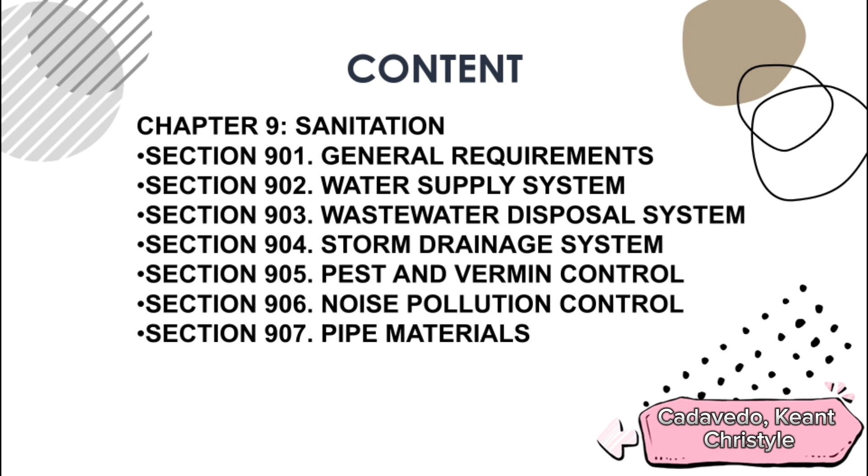So here's the content of our report. Chapter 9, Sanitation: Section 901, General Requirements; Section 902, Water Supply System; Section 903, Wastewater Disposal System; Section 904, Storm Drainage System; Section 905, Pest and Vermin Control; Section 906, Noise Pollution Control; Section 907, Pipe Materials. Chapter 10, Building Projection over Public Streets.

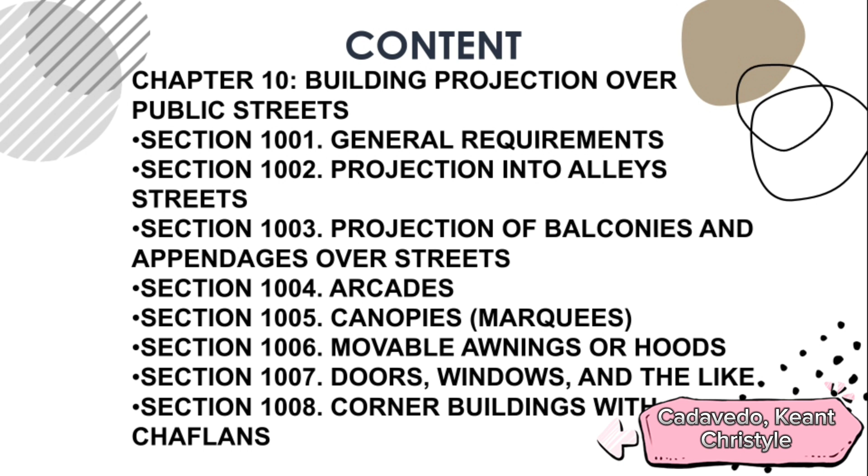Section 1001, General Requirements. Section 1002, Projection into Alleys and Streets. Section 1003, Projection of Balconies and Appendages over Streets. Section 1004, Arcades. Section 1005, Canopies or Marquee. Section 1006, Movable Awnings or Hoods. Section 1007, Doors, Windows, and the like. And lastly, Section 1008, Corner Buildings with Chaflans.

First section under Chapter 9 is General Requirements. Nakasaad dito yung mga nire-require na dapat meron ang isang bahay. It requires that every building intended for human habitation shall have first an adequate and potable water supply. Dapat meron malinis na tubig and sapat na tubig para sa mga taong naninirahan.

Next is plumbing installation, meaning ito yung way ng clean water na papasok sa bahay and meron ding dapat na way para sa wastewater na palabas. It could also mean na dapat merong heating and cooling system yung bahay. Next, you shall also have stormwater drainage, ito naman para sa tubig ulan.

Next is pest and vermin control, so dapat yung bahay or building ay protected from pest and vermin. Ano nga ba ang ibig sabihin ng vermin? Basically, yung vermin ay yung daga, ipis, bedbugs, termites, and such organisms na nakaka-disturb o nakaka-istorbo sa mga occupants.

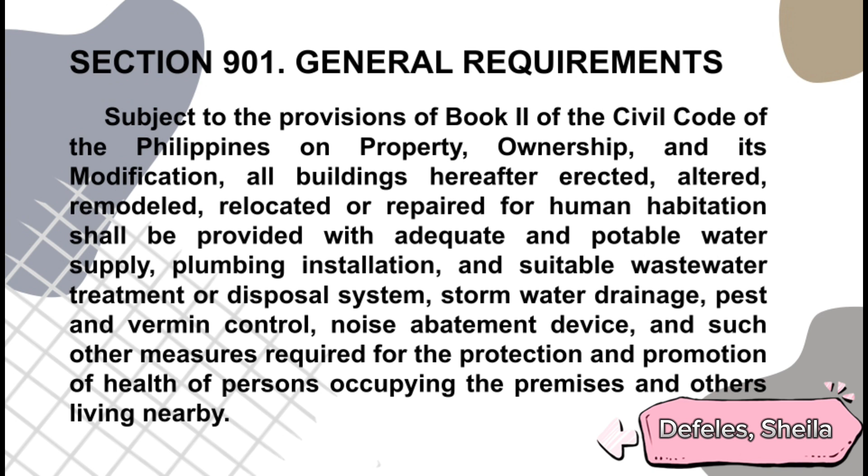Next is dapat merong noise abatement device. Ang purpose naman ng noise abatement device ay to control the industrial noise pollution. And lastly, dapat it shall promote health of person occupying the premises and others living nearby.

Second section under Chapter 9 is 902, Water Supply System. Under it, A: whenever available, the potable water requirements for a building used for human habitation shall be supplied from existing municipal or city waterworks system. Ang sinasabi dito ay kapag magtatayo tayo ng building o bahay for human habitation, yung magiging supply natin ng water ay dapat nakakonekta sa isang existing municipal or city waterworks system.

Example dito ay yung Manila Water. I-connect lang natin doon yung mga pipes natin para makapag-provide sila ng safe and potable water to supply the residents ng iyong building. The quality of drinking water from meteoric, surface, or underground sources shall conform to the criteria set in the latest approved national standard for drinking water.

Ang example dito ay yung mga area o bahay na hindi directly nakakonekta sa Manila Water, since ang Manila Water naman ay nag-provide ng potable water. Example dito ay yung mga deep well. Sa deep well, ang source nun ay from underground. Kaya hindi lang basta-basta dapat kumukuha ng tubig doon, dapat na-test siya and nakaayon sa sinasabi dito na national standard for drinking water.

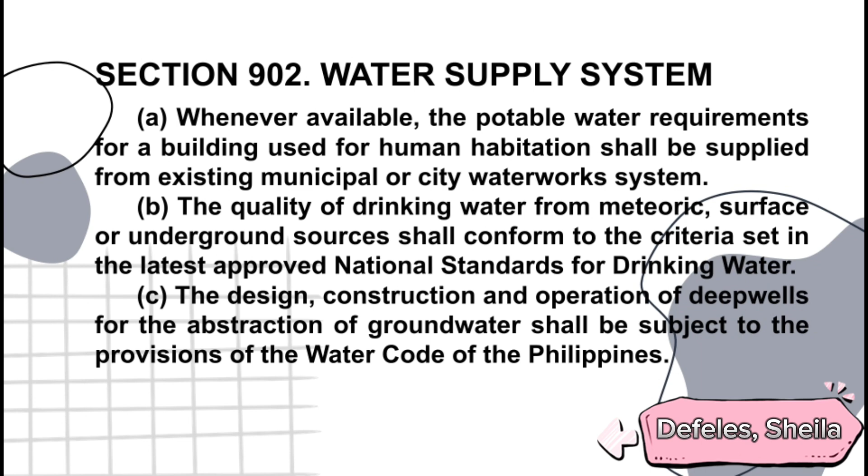The next one: the design, construction, and operation of an independent waterworks system for private housing, subdivision, or industrial estates shall be governed by the existing laws relating to the local waterworks system. Dito naman, kahit independent o private na ang mga water supply system na pinapatayo nila, dapat ang design, construction, and operation pa rin nun ay under or governed by the existing laws relating to the local waterworks system, since yun na ang standards na dapat sinusunod.

The last one under Section 902, Water Supply System: the water piping installation inside the buildings and premises shall conform to the provisions of the National Plumbing Code of the Philippines. Basically, ang sinasabi lang dito sa huli na ito ay lahat ng piping installation sa isang building na itatayo o sa isang building na may human habitation ay dapat naka-conform o naka-ayon sa provision ng National Plumbing Code of the Philippines.

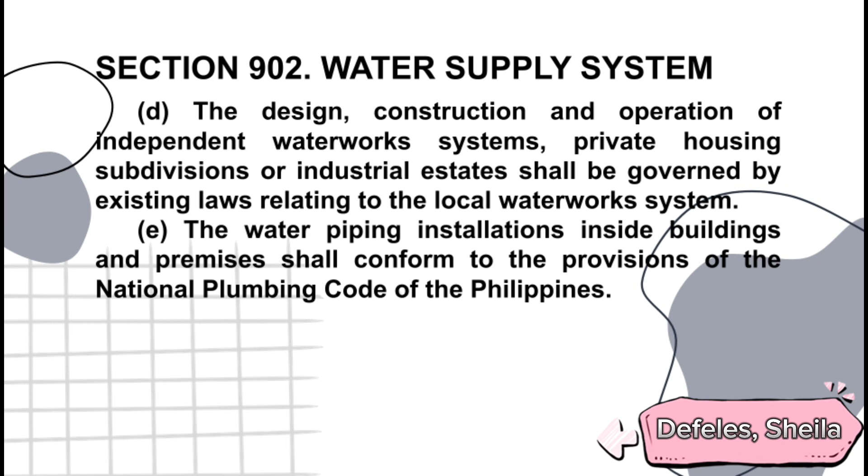And sinasabi na ang main goal lang naman ng National Plumbing Code of the Philippines is to ensure the qualified observance of the latest provision of the plumbing and environmental law.

The third section under Chapter 9 Sanitation is Section 903, Wastewater Disposal System. Clause A: Sanitary sewage from buildings and neutralized or pre-treated industrial wastewater shall be discharged directly into the nearest street sanitary sewer, main or existing municipal or sanitary sewerage system, in accordance with the criteria set by the Code on Sanitation and National Pollution Control Commission. Bale, sinasabi dito na yung sanitary sewage from buildings or mga industrial wastewater is dapat ini-discharge directly sa pinakamalapit na street sanitary sewer. Pero hindi lang syempre yung sinidischarge ng basta-basta, dapat in accordance with the criteria set by the Code on Sanitation and the National Pollution Control Commission.

So first, ano ba yung Code on Sanitation? It is said na the objective of this Code on Sanitation is the improvement of the way of life of the Filipinos by directing public health service towards the protection and promotion of the health of the people. So basically, yung main goal niya is paprotektahan yung Filipino citizens from dun nga sa mga harmful effects ng sanitary sewage or industrial waste. Then next is the National Pollution Control Commission.

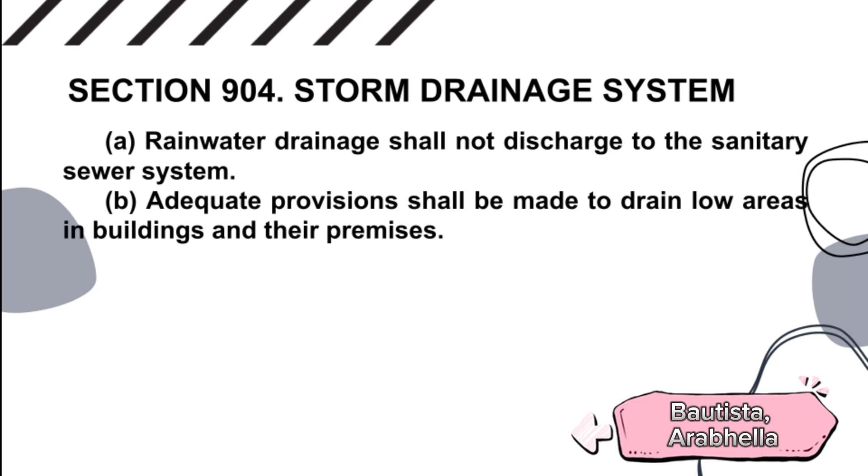Section 905, Pest and Vermin Control. A. All buildings with hollow and/or wood construction shall be provided with rat proofing. So, ayun, to prevent rats from entering our home, especially yung mga bahay na gawa sa light materials, ay dapat provided with rat proofing or harangan ng screen yung mga entry point or mga butas na maaaring pasukan ng daga.

B. Garbage bins and receptacles shall be provided with ready means for cleaning and with positive protection against entry of pests and vermin. So, dapat yung mga garbage bins and receptacles ay panatilihing malinis at may takip upang hindi pamugaran or pasukan ng mga pests and vermin.

Yung mga pests ay yung mga langaw, at vermins naman ay yung mga daga. Section C: Dining rooms for public use without artificial ventilation shall be properly screened. So yung mga dining rooms na intended for public use at hindi ginagamitan ng artificial ventilation like exhaust fan ay dapat properly screened o protected ng screen yung mga butas na maaaring pasukan ng pests and vermin like doors and windows.

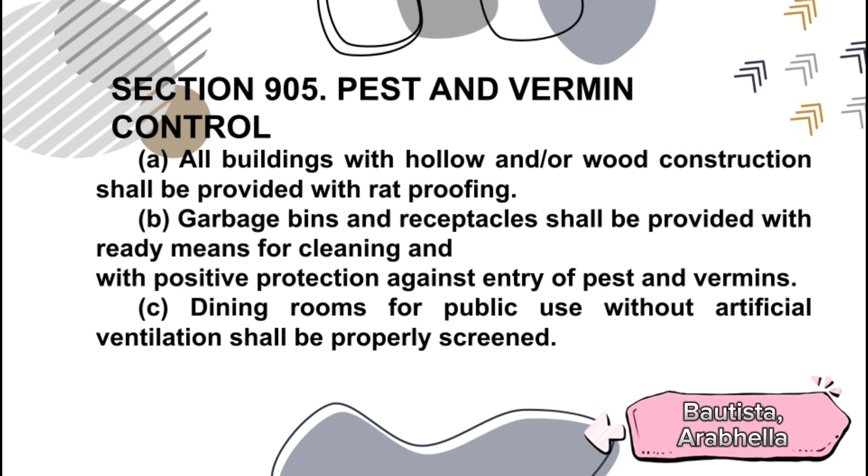Section 906, Noise Pollution Control. Industrial establishments shall be provided with positive noise abatement devices to tone down the noise level of equipment and machineries to acceptable limits set down by the Department of Labor and the National Pollution Control Commission. Karamihan ng mga equipment and machines na ginagamit especially sa construction and industrial establishment ay may ingay, kaya para mabawasan yung ingay na produce ng mga equipment and machines kapag ginagamit especially sa gabi, dapat may provided na noise abatement devices para hindi nakakaabala sa mga taong malapit sa area.

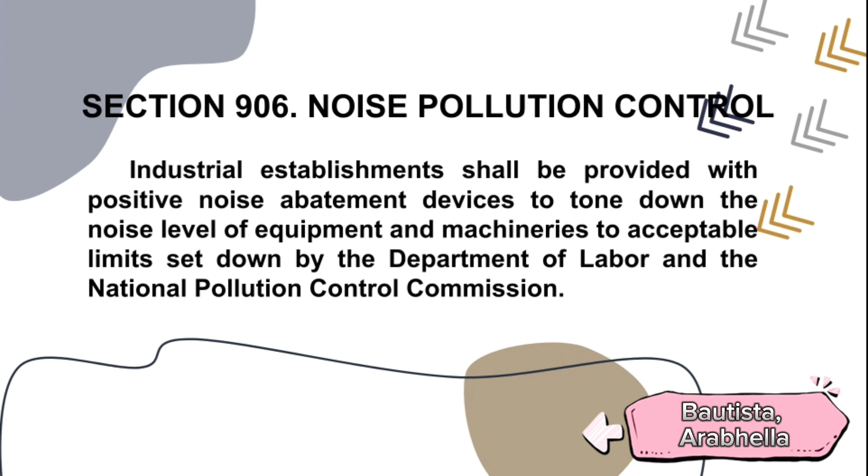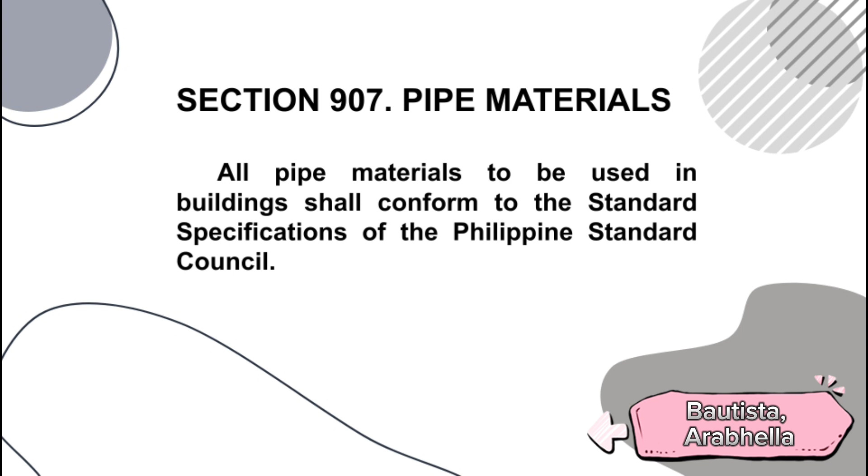Our next topic is Chapter 10, the building projections over public streets. In here we can see or learn the requirements of the buildings that are near a public street.

The first one in Chapter 10, Section 1001, General Requirements. A: No part of any building or structures or any of its appendages should project beyond the property line of the building site except as provided in this code. The projection of any structure or appendage over a public property should be the distance measured horizontally from the property line to the outermost point of the projection.

Ibig sabihin, hindi pwedeng lumagpas ang anumang structures ng building mo sa ibang gusali na hindi nasakop ng property niyo. Halimbawa, may tanim kang puno ng mangga sa bakuran. Kung yung sanga o bunga nito ay lumagpas sa bakuran ng kapitbahay niyo, yung part ng puno na yon ay magiging property o pagmamayari na nila. Ganun din kung lumagpas ito sa daanan ng tao, magiging public property na ito. Kung hanggang saan lang yung property line niyo, dapat hanggang doon lang din yung structures ng building mo.

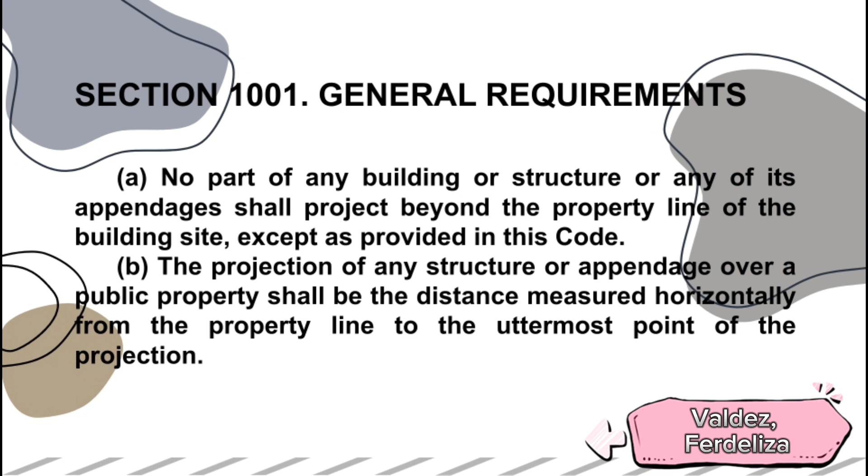Section 1002, Projection into alley streets. No part of any structure or its appendage shall project into any alley or street, national road or public highway except as provided in this code. Footing located at least 2.40 meters below grade along national road or public highway may project not more than 300 millimeters beyond the property line. So along a public highway, the projection should not extend more than 300 millimeters and the footing should at least be located at 2.40 meters below the grade.

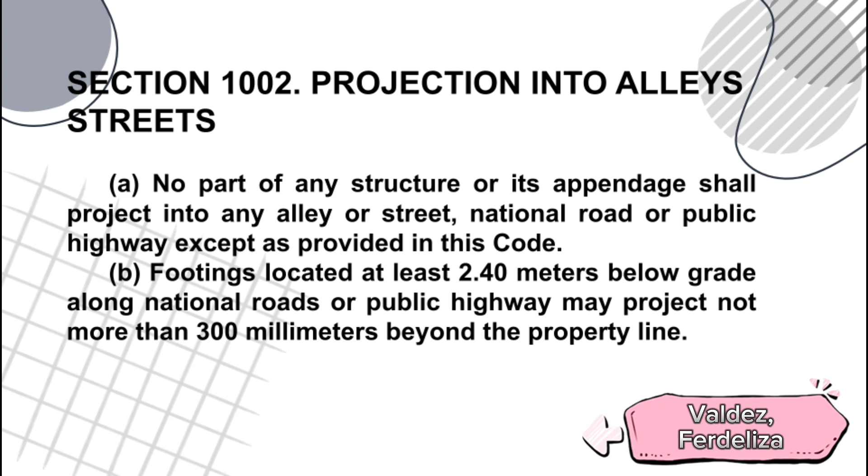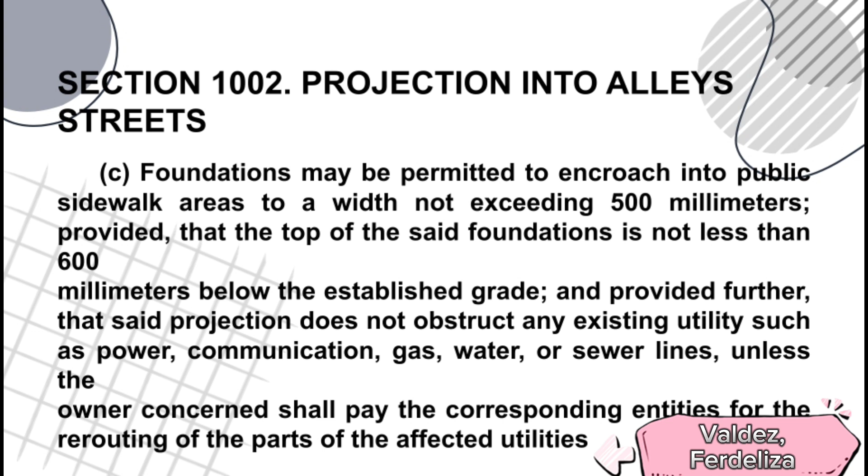Section 1003, Projection of balconies and appendages over streets. The extent of any projection over an alley or street shall be uniform within a block and shall conform to the limitations set forth in Table 1003, Projection of balconies and appendages. The clearance between the established grade of the street and/or sidewalk and the lowest undersurface of any part of the balcony shall not be less than 3.00 meters. There must be a minimum of 3 meters between the lowest base of any part of the balcony and the established grade of the roadway or sidewalk, meaning the vertical distance or clearance shall not be less than 3 meters.

So it is okay to put balconies over the sidewalk as long as you follow the provided distance.

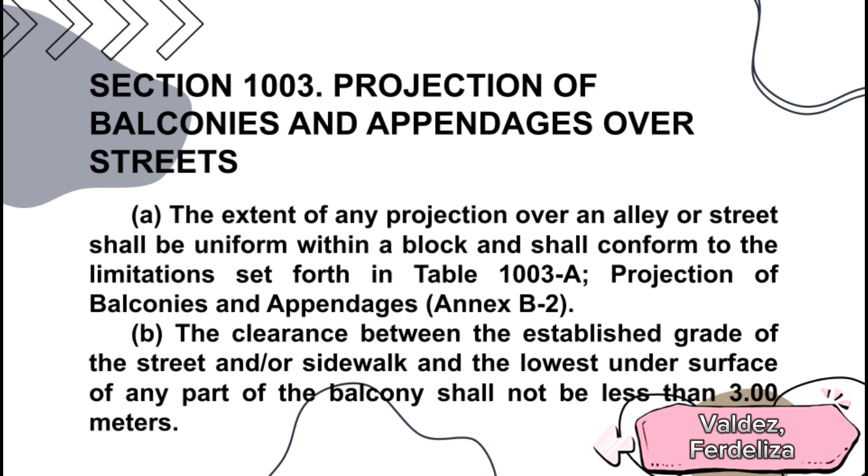Section 1004, Arcades. Whenever required by existing building and zoning regulations, arcades shall be constructed on sidewalks of streets. The width of the arcade and its height shall be uniform throughout the street, provided that in no case shall an arcade be less than 3 meters above an established sidewalk grade.

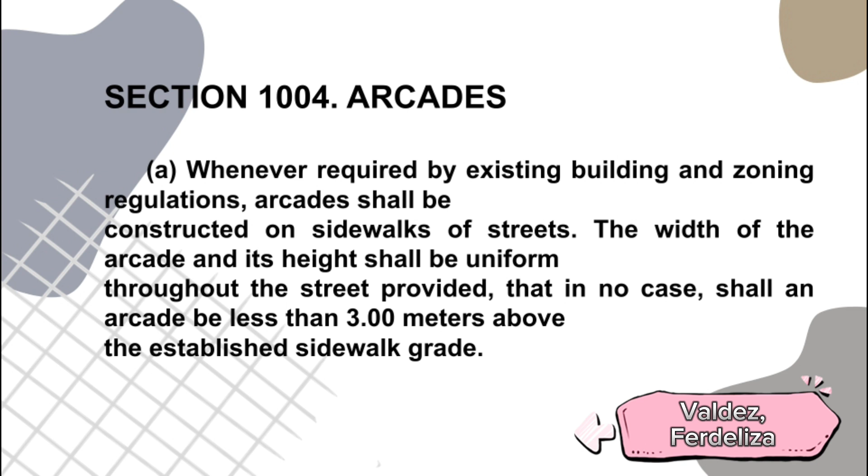It's self-explanatory that it means the arcade must be built on street sidewalk as authorized by the current zoning and construction code or building codes, as long as an arcade is never less than 3 meters above the designated sidewalk grade. Both its width and height must be uniform along the entire street.

Chapter 10 talks about the projection over public streets, and this will be tackled if the building involves canopies or if it is near a public property like streets, national road, or public highway.

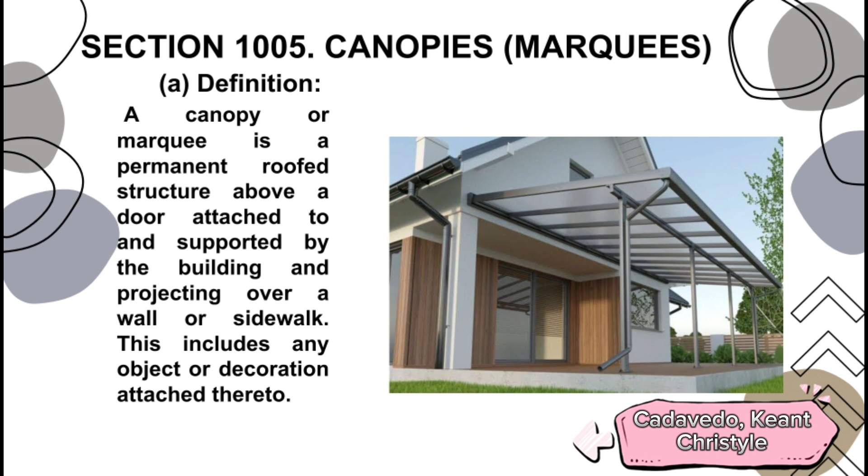Section 1005, Canopies or Marquee. Definition: a canopy or marquee is a permanent roof structure above a door attached to and supported by the building and projecting over a wall or sidewalk. This includes any object or decoration attached thereto. There's an example here of a canopy.

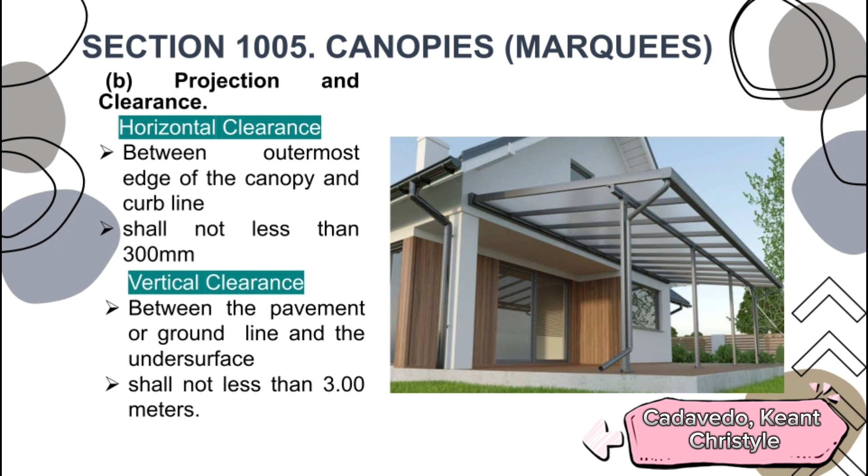B. Projection and clearance. This is the measurement that should be followed for a canopy when attached to a building. For horizontal clearance, between the outermost edge of the canopy and curb line shall not be less than 300 mm. For vertical clearance, between the pavement or ground line and the undersurface shall not be less than 3.0 meters.

C. Construction. It shall be constructed of incombustible materials or not less than 2-hour fire-resistive construction. What are examples of incombustible materials? It can be brick masonry, concrete blocks, hard backer board, calcium silicate board, cement board, metal, and certain types of glass.

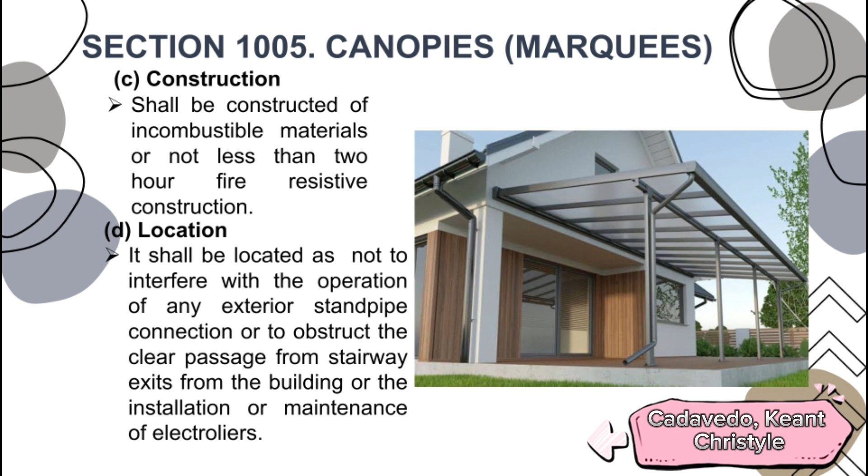Location. It shall be located so as not to interfere with the operation of any exterior standpipe connection or to obstruct the clear passage from stairway exits from the building, or the installation or maintenance of electroliers. So for location, it's necessary to consider that the installation of a canopy does not interfere with the operation of any exterior standpipe connection, and also should not obstruct or block the passage of a stairway exit in a building.

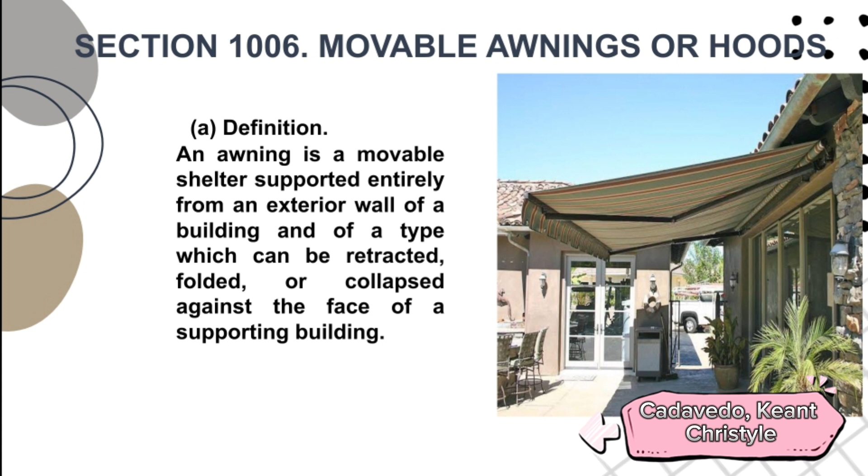Section 1006, Movable awnings or hoods. Definition: an awning is a movable shelter supported entirely from an exterior wall of a building and of a type which can be retracted, folded, or collapsed against the face of a supporting building.

Clearance. Again, horizontal and vertical clearance. For horizontal clearance, between the awning and the curb line shall not be less than 300 mm. For vertical clearance, between the undermost surface of the awning and the pavement or ground line shall not be less than 2.40 meters.

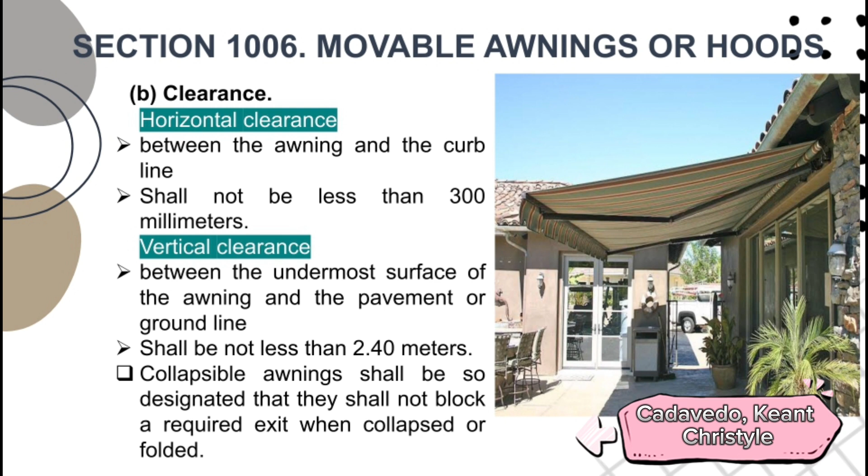Any collapsible awnings shall be so designed that they shall not block a required exit when the movable awning or hood is closed or folded.

Section 1007, this is about doors, windows, and light. Except for fire exit doors, windows, and the like that are less than 2.40 meters above the pavement or ground line of a building, these shall not project beyond the property line when fully open or upon opening.

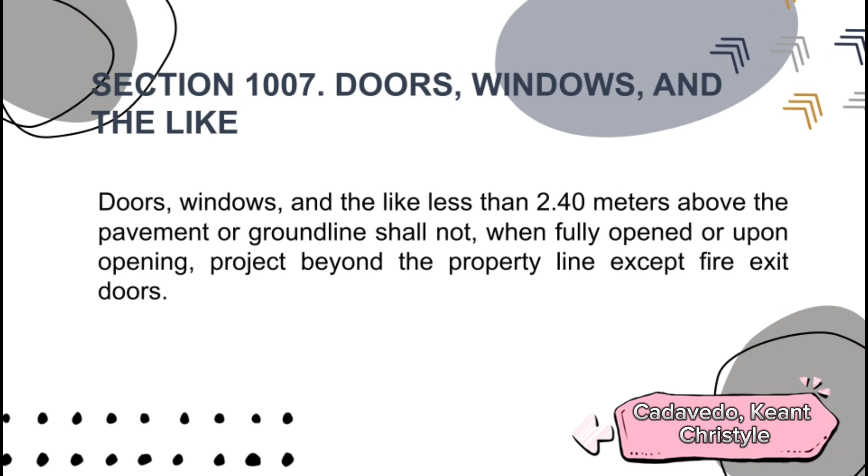And lastly, Section 1008, Corner buildings with chaflans. Public street or alley less than 3.60 meters in width shall be truncated at the corner. The face of the triangle so formed shall be at right angles to the bisector of the angle of the intersection of the street lines.

If the building is arcaded, no chaflan is required, notwithstanding the width of the public street or alley less than 12.0 meters.

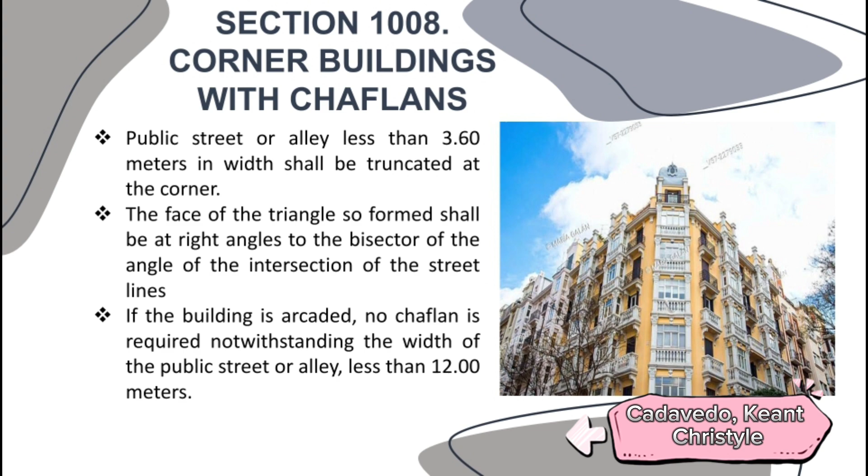So when the building is arcaded, the chaflan is no longer required. And in some cases, the building official will determine the size and form of the chaflan to be placed on a corner building. And that's all our topic, thank you for listening.